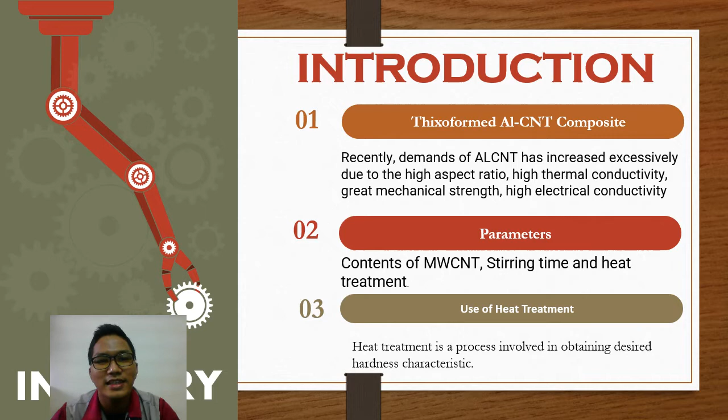Problem statement. Al-CNT composite has been widely applied in industries, resulting in the importance of finding out the highest hardness characterization. There are various factors that can affect the hardness characterization, which are mixing process, mixing technique, amount of reinforced material, and post-processing method such as thixoforming and heat treatment. Our study shall investigate the hardness characteristic obtained after thixoformed Al-CNT goes through T6 heat treatment.

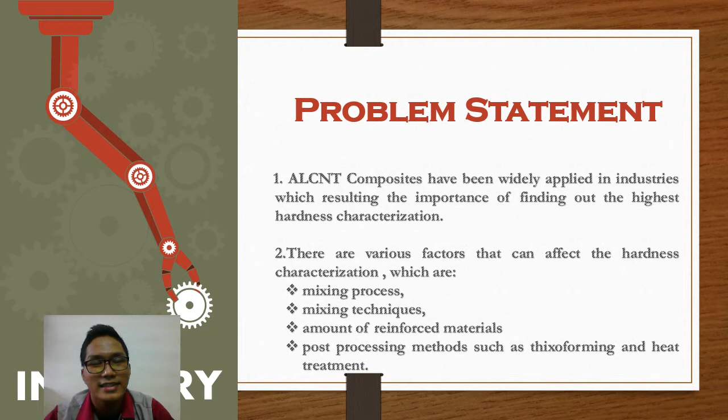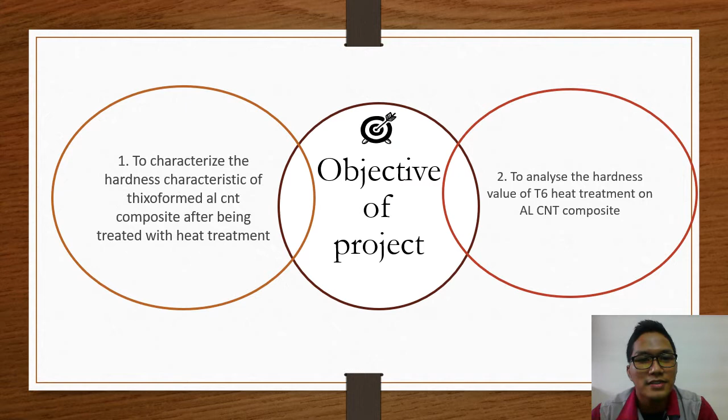There are two main reasons why this study has been carried out. First is to characterize the hardness characteristic of thixoformed Al-CNT composite. Second, to analyze the hardness value of T6 heat treatment on Al-CNT composite. However, the study is limited to the scope of this project, whereby it is limited to four components, which are material, process, heat treatment, and machine.

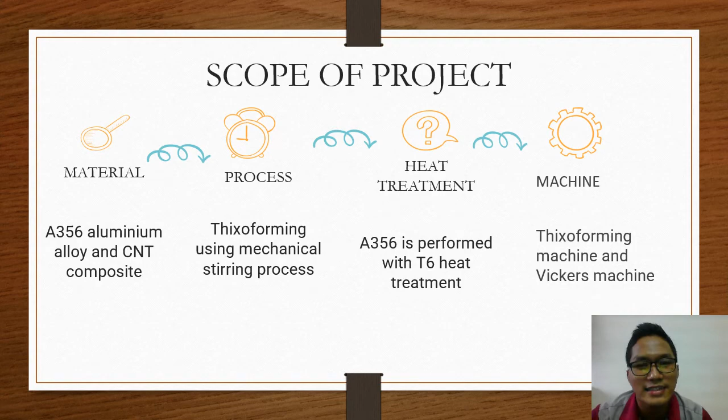There are two materials being used in this study, which are aluminum alloy, or to be precise, A356 alloy, and carbon nanotube composite. The composite goes through the thixoforming process by way of mechanical stirring method, and later the A356 undergoes T6 heat treatment process. The study involved two major machines, which are the thixoforming machine to conduct the thixoforming process and the Vickers machine for testing the hardness value.

Looking forward to Chapter 2, the study could not be complete without referring to the previous studies and research conducted by other experts. Most of this research was carried out by referring to these four main articles, which are articles entitled A356 Aluminium and Application, Carbon Nanotube and its Application, an overview of semi-solid metal processing, and optimization of mechanical stir casting parameters for fabrication of carbon nanotube aluminum alloy composite through Taguchi method.

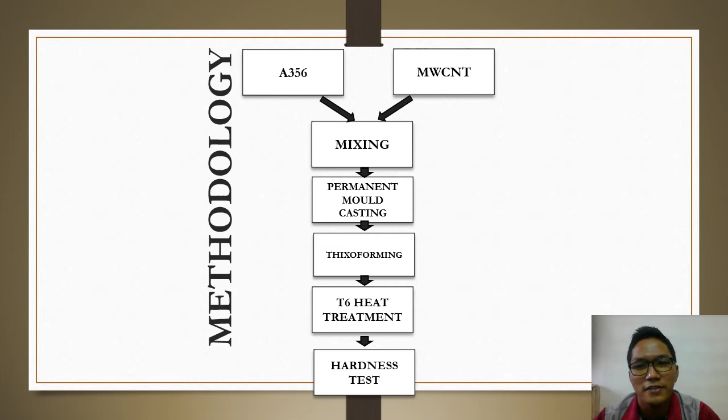As you can see, this is the flowchart of our study in making sure that the project is carried out accordingly. The process involves 6 steps. In completing this study, there are 6 processes that have been carried out, namely sample preparation, mixing, casting, thixoforming, heat treatment, and hardness testing.

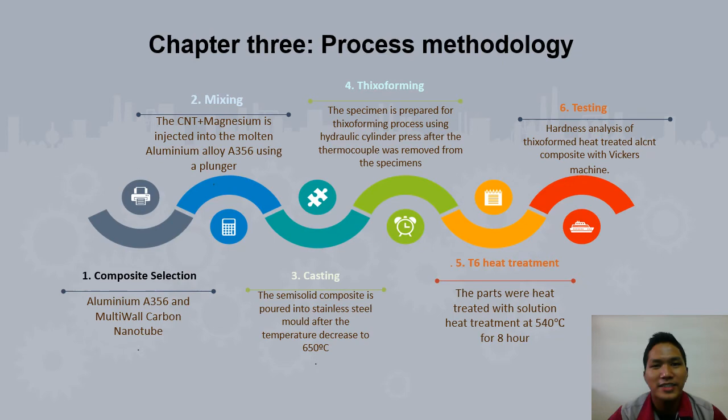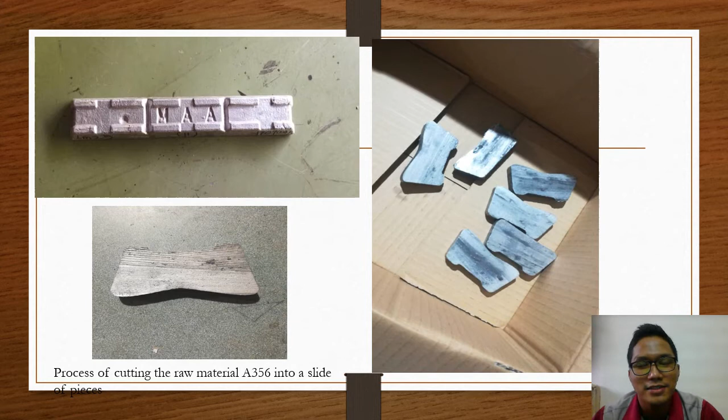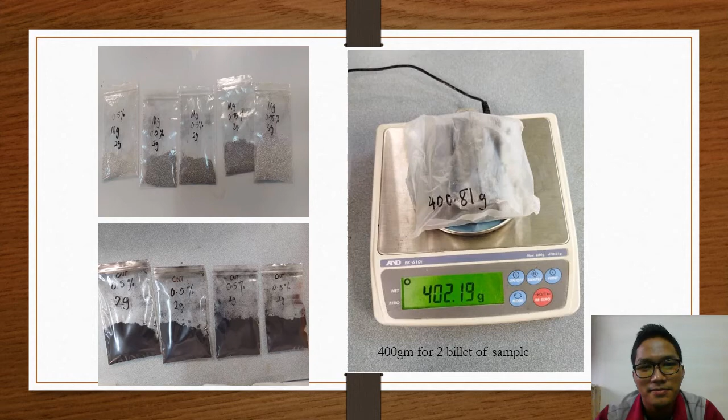As you can see in the picture, first during the material preparation, A356 blocks were cut into slices using a bandsaw machine. Then, the A356 was weighed at 400 grams to produce 2 billets of sample, while magnesium and carbon nanotube were weighed at 0.5 weight percentage, 0.75 weight percentage, and 1.0 weight percentage by using a weighing machine. The samples were made at aluminium melting point of 700 degrees Celsius with a portable melting furnace.

Thus, multi-wall carbon nanotube powder and magnesium flakes were mixed together and wrapped with aluminum foil before being immersed into the A356 alloy by using a plunger. The content of multi-wall carbon nanotubes involved 0.5 weight percentage and 1.0 weight percentage respectively, and 0.5 weight percentage and 0.75 weight percentage of magnesium. The mechanical stirrer was turned at a maximum speed of 500 rpm to stir the mixture for 10 minutes.

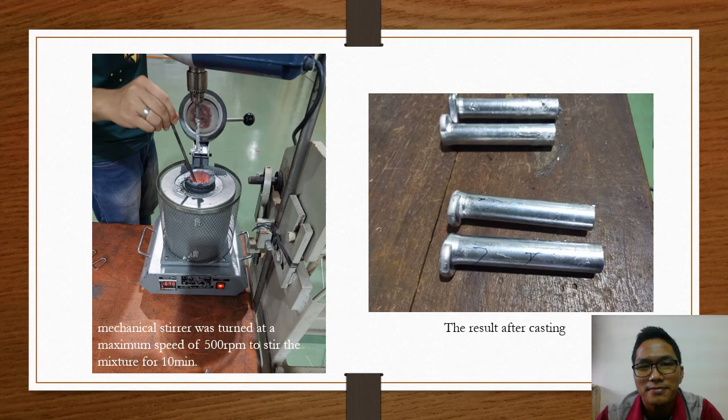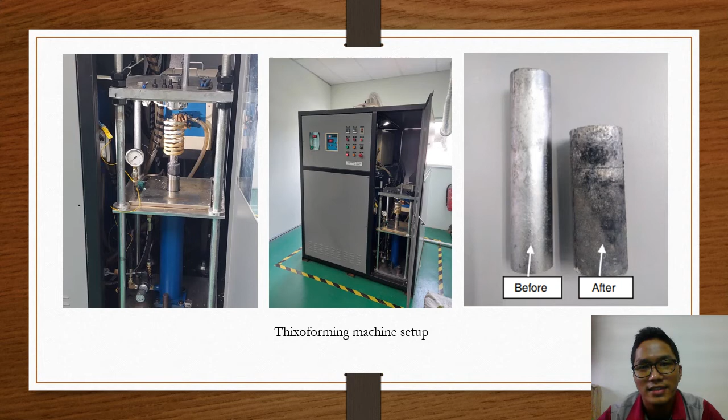The specimen then continued with the thixoforming process. This figure represents the thixoforming setup. A bar of cylindrical specimen was cut into suitable slug length and reheated into semi-solid state to be formed in the die. In this process, the specimen was heated by a high-frequency induction coil, and a K-type thermocouple was used to control the heating temperature, located 5 mm from the top of the slab. The thixoforming process was carried out by using a hydraulic cylinder press after the thermocouple was removed from the specimen.

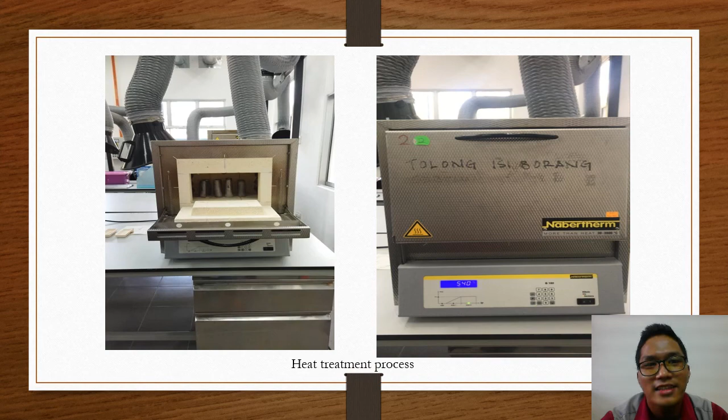After that, the parts were heat treated with solution heat treatment at 540 degrees Celsius for 8 hours by using the Nabertherm furnace as shown. Hence, the solution heat treated part was quenched at room temperature at 27 degrees Celsius.

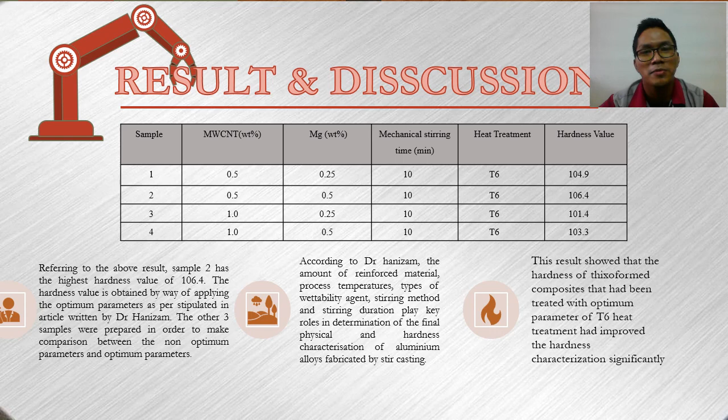After going through the process mentioned earlier, the result shows the sample with the highest hardness value of 106 is sample 2. The hardness value is obtained by applying the optimum parameter as stipulated in the article written by Dr. Hanizam. The other three samples were prepared in order to make a comparison between the non-optimum parameter and optimum parameter. This proves that heat treatment with optimum parameter provides the best result of hardness value.

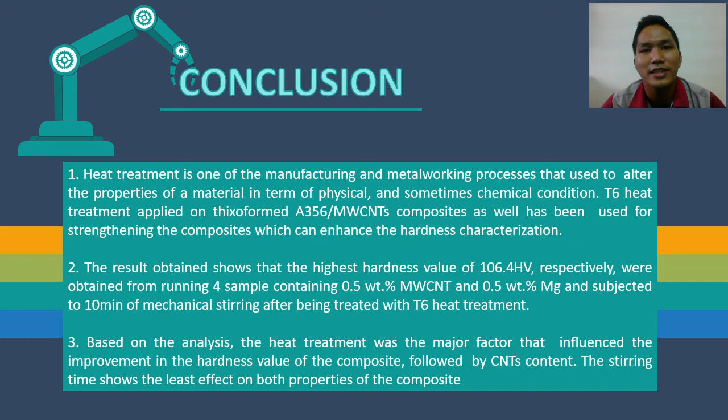Finally, we can conclude that according to the analysis carried out, the heat treatment was the major factor that influenced the improvement in the hardness value of the composite, followed by carbon nanotube contents. The stirring time showed the least effect on both properties of the composite.